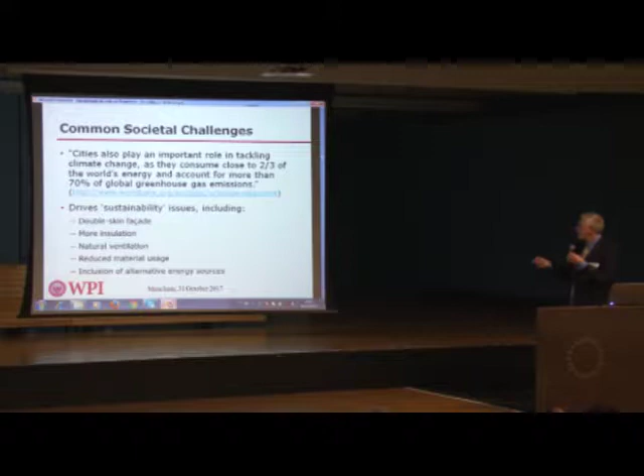Another challenge, as I had mentioned, is that as we look at sustainability issues and trying to reduce energy, we look very much at buildings. And it's been discussed that cities and very much buildings consume close to 2/3 of the world's energy and account for more than 70% of the global emission of greenhouse gases. So that really drives this issue for reducing the power load in buildings. So reducing the heating, ventilation, and air conditioning, reducing the lighting, being more efficient, adding more thermal insulation and other measures. And that gives us different opportunities.

For example, a double skin facade on the building, where now instead of just having the glass on the exterior, you have maybe a meter of space and another glass exterior, and the area in between is open, used for heating and cooling the air naturally in the tall building. And in concept, it works well, and for energy efficiency, it works well. But now we've just created an unmitigated path for fire and smoke. We spend a lot of time trying to make sure that we encase stairwells, elevators, mechanical shafts inside of the building. Now we're adding them to the exterior, which could create new problems.

We're adding more insulation. This is an issue of the Grenfell Tower, and I'll talk a little bit about that. But as Professor Sekizawa said, as we're becoming more energy efficient, people are looking for ways to better insulate buildings. And because a large number of our building stock is existing buildings, the most efficient way to energy retrofit is to put insulation on the facade. So if you're using combustible facade material and combustible insulation, now you're creating a new type of fire threat that in tall buildings is quite significant.

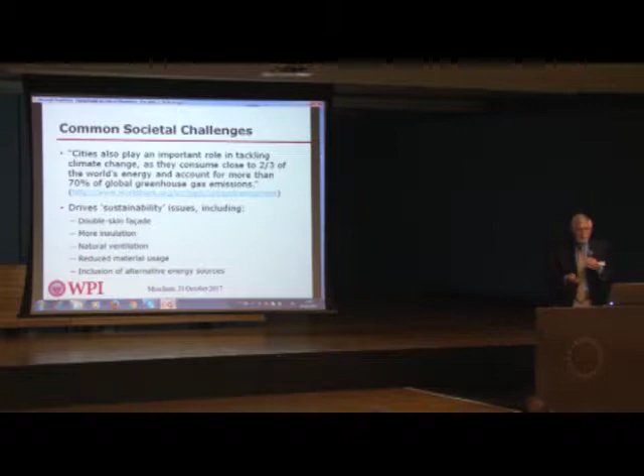And if people aren't really talking to each other, we set up this challenge of having competing objectives, and sometimes you're going to lose a particular feature or function of a building, and it could be a safety issue. But that's a whole other discussion for another day.

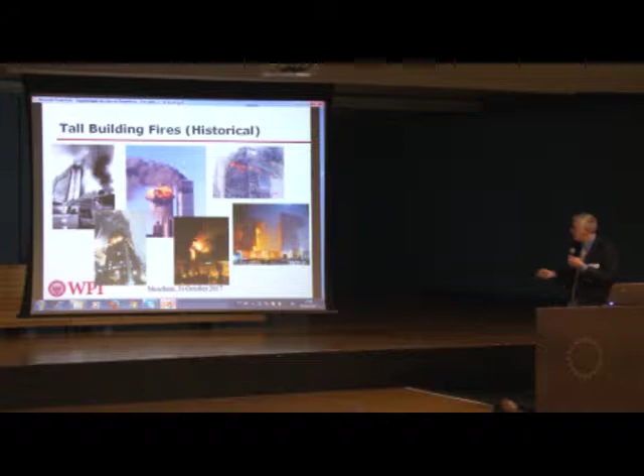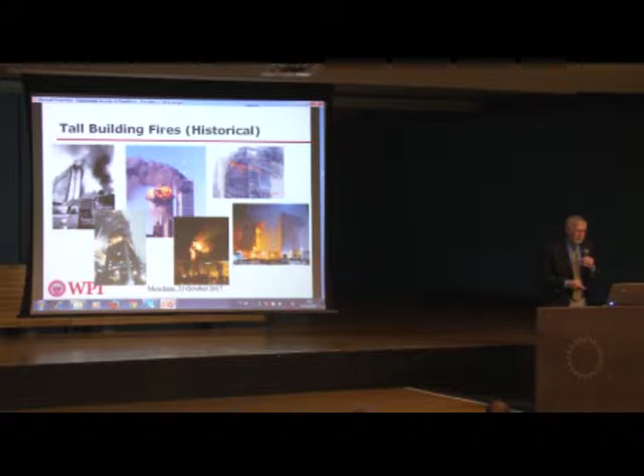So I won't talk about the historical fires. Professor Sekizawa did a very good job of that. But we unfortunately have very good examples of what not to do in buildings. The problem is we seem to keep repeating some of those problems. So even though we understand them, we seem to have a problem in repeating.

One of the challenges that we have today that we didn't have as much a few years ago is this issue of exterior facade fires. So we started to see quite a bit of them in the Middle East region maybe about 5 years ago, and we saw quite a few in China as well.

We've had some in the US, we had some in Australia, as I pointed out also this morning, but it wasn't until the Grenfell fire that people in countries that thought they knew what they were doing really realized that there was a major problem with putting combustible exterior facades onto buildings. So I'll talk more about that in a few minutes.

But other issues, the elevator operation, and Sekizawa talked about that. We know we need to use elevators to move people in and out of buildings, but when you're 800 meters or 1,000 meters and you need to move people, how does that system have to work? How do you have to protect the shaft? How do you deal structurally with not having too much movement in the building so that you don't get the elevator off of its pathway?

Structural fire resistance becomes a big issue because you're not going to be able to effectively fight a fire 50 stories, 80 stories above ground. You need that structure to be able to withstand the expected fire.

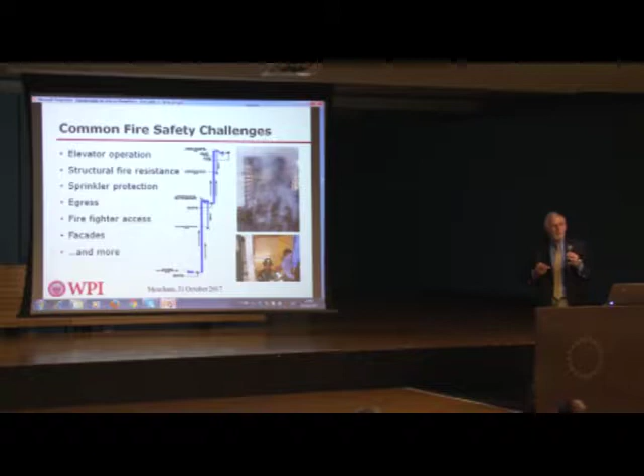And we'll talk about some of the facade issues and more as we go along. So these were all seen as issues that we wanted to somehow address in the guidelines. In addition, there's also the challenge of local availability of materials and components. And I was talking with some people about this earlier.

There's often the idea that you can look at what another country is doing, look at what their standards are, look at what the equipment is, but are you going to get that same equipment into your country? Do you have the same level of installation and maintenance standards? Do you expect things to work in the same way? It can be very difficult to adopt a standard from another country that assumes a certain level of technology, maintenance, knowledge, performance, but if you don't have that where you're implementing it, it can be a problem.

The local infrastructure is similar. That's your electrical grid, that's your water supply system, all of these other factors. In some of the Chinese cities, and particularly in some of the Middle East cities where they're building cities in the desert, you really have to think ahead about putting all that infrastructure in and then having a reliable power system. If you don't have a reliable electrical system and you build a super tall building and you're relying on elevators for evacuation and you don't have power, what are you going to do to get people out of 100, 150 stories? They will walk down the stairs. But that doesn't make it very easy for anyone going up in terms of dealing with an event.

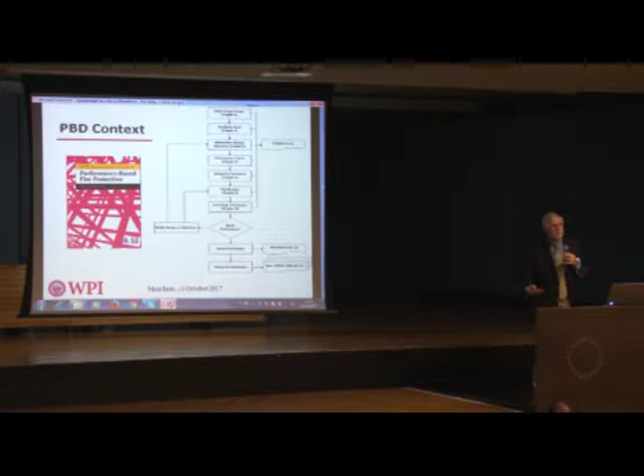So we start the process with a hazard and risk assessment. And when you're dealing with very tall buildings, it's not just fire. Unfortunately, we may have to think of terrorism, but also infrastructure, as I said before, the power grid going out or water issues, weather conditions in terms of very high wind, drought conditions, and others. So a tall building with a power outage is a big problem for all the people that live there.

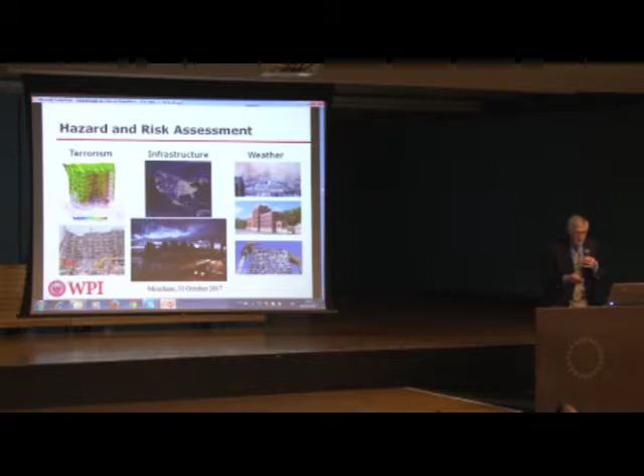So cities have to think about that, not just in terms of the fire safety, but in the ability of the people. And you have to think about what additional measures you might need to put in that building for life safety systems to effectively get people out in the event of a fire.

We recommend that a risk and reliability analysis be undertaken on the different systems within the building. So that's, for example, doing a fault tree analysis of what the different failure modes might be in your water supply system, your power system, your sprinkler system, your smoke control system, all of these areas to understand, is there any opportunity for what we call a single point of failure, where if you lose a critical system or component, you lose the capacity of that protection measure.

An example of that would be a water supply system for a sprinkler in a tall building. If you have a single riser, single hydrant system going up the building, and you have an event that causes you to lose that riser, now you have no sprinkler protection in the building. And there was a very good example of that, perhaps a bad example, the World Trade Center bombing from 1993.

So in 1993, the terrorists put a truck bomb in the parking area below the World Trade Center, which happened to be near the shaft which carried the communications and the power up the entire tower complex. So when they set off that bomb, you lost the fire alarm system, you lost emergency power, you lost communication. And at the end of the day, it took about 4 hours to completely evacuate both towers, in part because nobody had information.

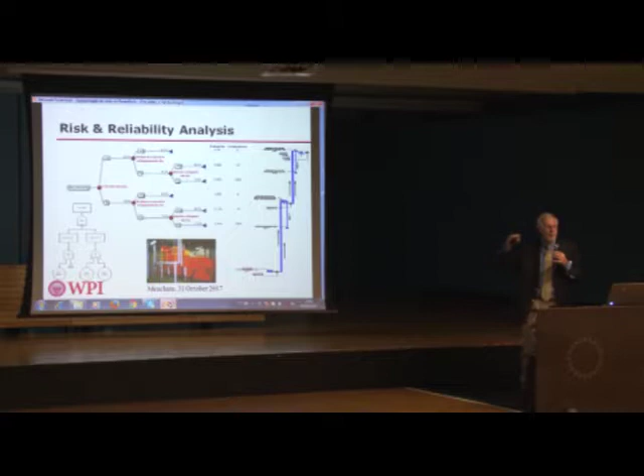So we always have to go through this learning process, but we have to really think about, what could fail and cause a problem. Then we look at what that problem is in terms of the fire, and we develop event trees that look at scenarios for both how the fire could spread and how big it could be if you have these failure points, but also what the impact might be in terms of getting people out of the building.

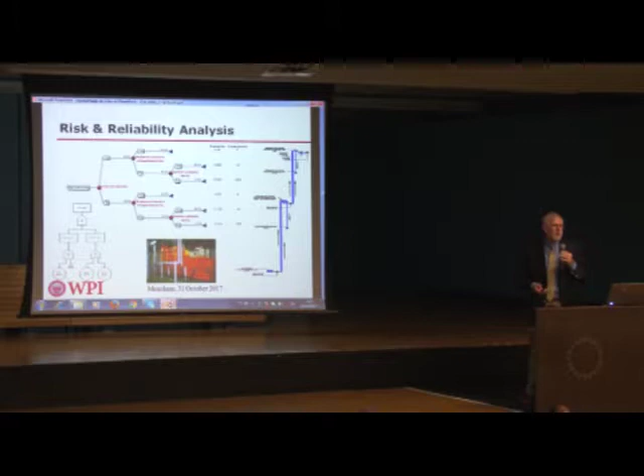So we tell people that this is required. We don't give a lot of detail, but we also point to, for example, the SFPE Handbook of Fire Protection Engineering, which has several chapters on risk and reliability analysis.

As Professor Sekizawa already discussed, egress is a big challenge in tall buildings. One of the first things you have to do is identify your egress goals. And by that, a simple question of, do you expect to simultaneously evacuate everyone from the building? Do you expect only to evacuate certain people and keep other people remaining in place? Or do you keep everyone in place except for the floor of the fire?

So Grenfell, for example, in the UK, they have a stay in place philosophy. So everyone basically was expected to stay in their homes because the compartmentation of the building was expected to keep the fire to one compartment while the fire brigade came in and did their job. But you have to decide which strategy you're going to use, because that's going to help make the determination.

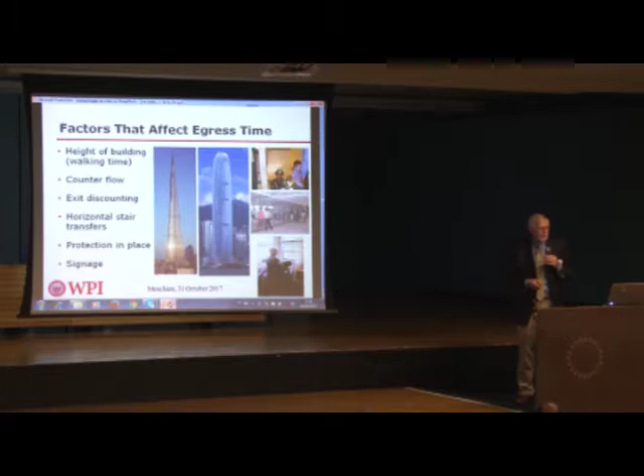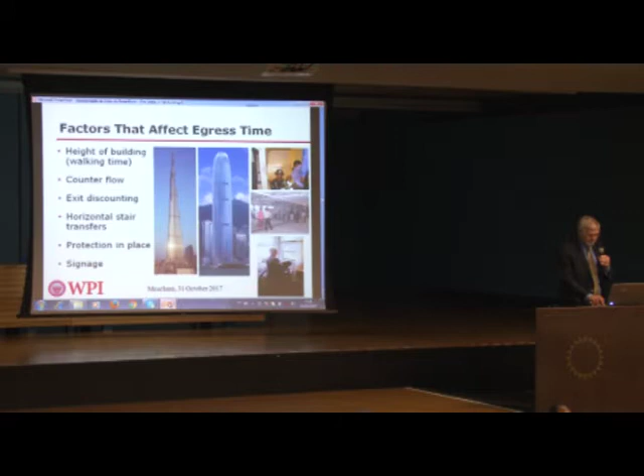Also, I showed earlier in one of the photos the Petronas Towers in Kuala Lumpur. And that's a building with 2 towers with a sky bridge connecting them. And maybe I'll try to go back to that quickly, if I can find it. So the idea initially when the building was constructed was you're only going to have an event in one building. So if the fire's in here, building occupants from this tower can go across the bridge and evacuate. And it makes perfect sense.

However, after 9/11, when there was an impact on the Twin Towers, there was an analysis done of the building, and they ran an evacuation drill. And so people came down here and crossed, but people came down here and crossed, and you had a problem in that sky bridge. And so you have to think, if you're assuming a scenario of one event in one tower, and you have many sky bridges here, what if you had simultaneous events? Are people going to be trying to exit from opposite directions into that sky bridge? So that's a scenario you might need to think about.

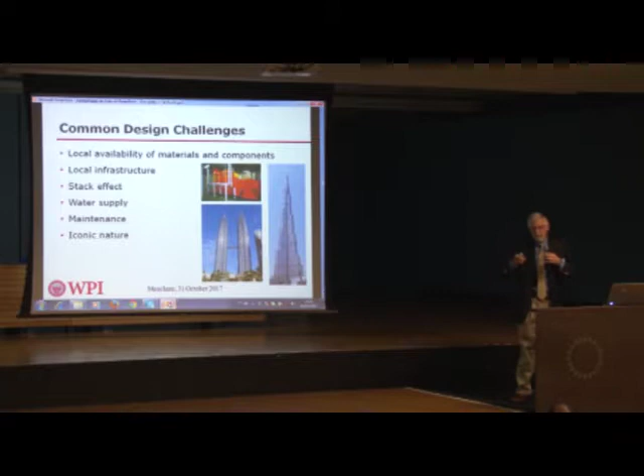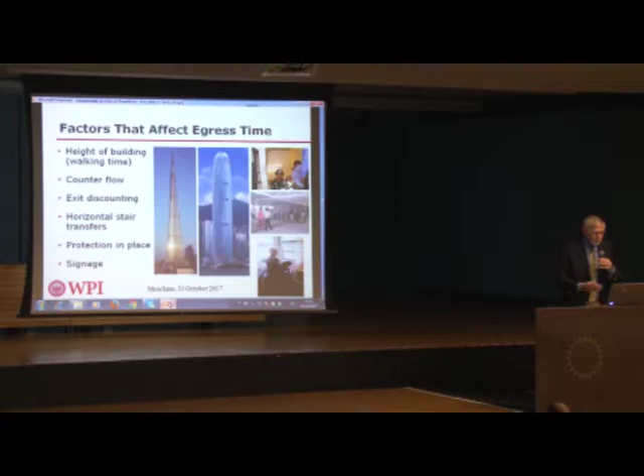And as buildings get taller, that becomes a bigger issue because you have much more limited space in the building to move people. So you have to think about all these different options, and when you get to protection in place, that becomes a big issue as well.

Professor Sekizawa talked about the use of elevators, both occupant use and fire service use. And I think, in my opinion, it's very difficult to design a super tall building without considering the use of elevators for occupant evacuation. One of the strategies that can be used, though, is to have people come down to a certain floor by stairs and then have elevators that can shuttle people to a lower level.

So instead of thinking about evacuating everyone using the elevators, you can think about only moving a certain segment of the building to a safe floor and then be able to shuttle people from there. And then you can maybe get a more effective use and optimization of the elevators and the stair use. But there is a big concern for protecting the elevators and developing appropriate control mechanisms so that people can feel safe.

In terms of the elevators, they have to be operational in an event if you expect people to use them. So they have to be protected against smoke ingress, they have to be protected against water coming in, perhaps from firefighting or sprinklers on an upper floor. You have to have very reliable controls. You need to have good communication.

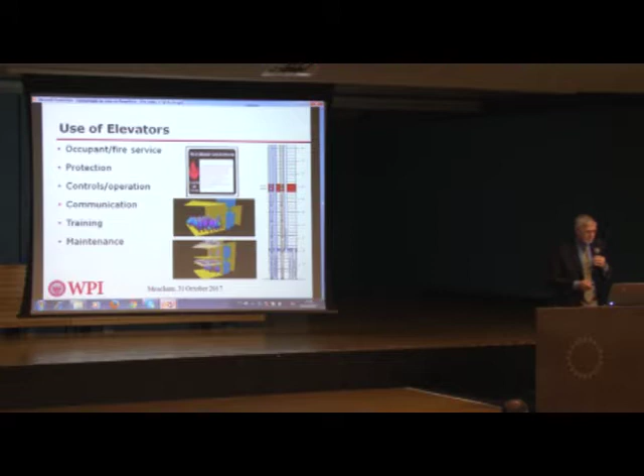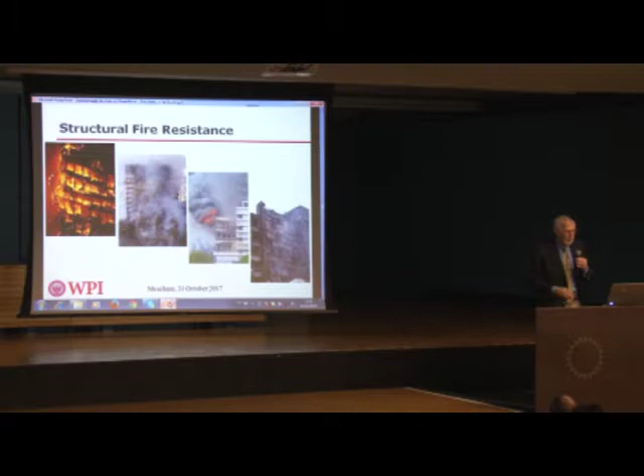So when you're doing design, you have to think about what is that movement of the fire? And it's not just the compartment of initial fire you're worrying about, it's what's the potential horizontal and vertical spread, and will you have heating and cooling effects that you have to deal with, and what kind of stress will that put on the building as well. So again, in the design, you really need to think about what your structural resistance goals are and what type of structural system you're going to have.

So how will the load shift as you have a fire? Will you get appropriate load redistribution? What's going to happen to the primary structure relative to the fire? Will you have spalling? Will you have loss of fire protection over time? And so you need to think about the different scenarios that you are going to assess the building under and pick strategies that are appropriate for the resilience.

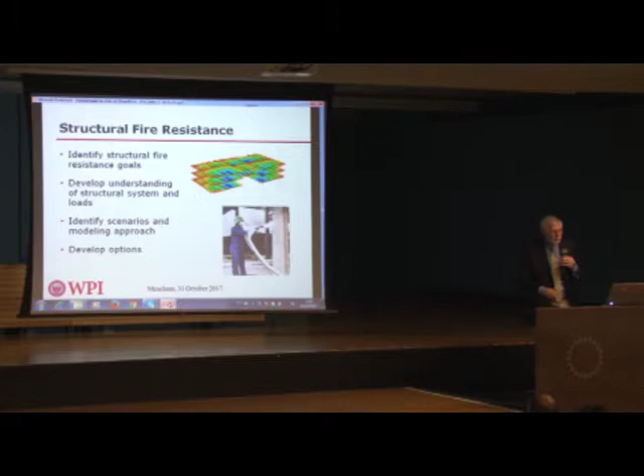One of the big challenges that I think we have with structural fire protection is that we have a significant reliance on the standard fire test. So we have in ISO and ASTM and other standards a standard design fire curve which talks about how much temperature you have increased over a particular period of time, in minutes or hours. But fire in a building doesn't know anything about the standard fire curve. It may be great for comparing products, but in reality, we have fires that may burn much hotter more quickly. We have fires that might be longer duration.

We have different effects. For example, I've done some work recently on post-earthquake fire performance. And one of the issues that you have in an earthquake is you get some damage, for example, to your fire protection system, for example, gypsum wallboard. And when you have a fire after you have damage to that gypsum wallboard, you can get failure of a 1-hour system within 10 minutes, because that fire rating in a furnace is based on perfect conditions.

But you rarely have perfect conditions in a building, just normally over a long time, but certainly after an event like an earthquake. So if you're assuming that you have a 1-hour fire resistance and you breach that protection in 10 minutes, you're going to have a much different challenge on your hands within that building. So you need to think about what your real fire scenarios are, what type of analysis you want to do, and what your criteria are.

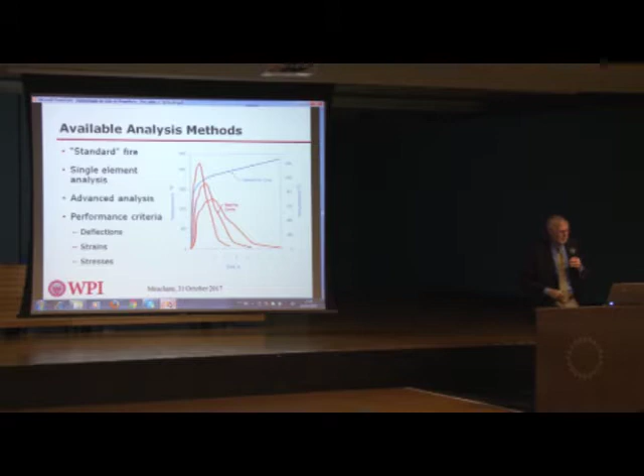It might be deflections in the members. It doesn't have to be full failure, but if you have a little bit of deflection and that opens a gap in the facade between the floor plate and the curtain wall to allow fire to spread, now you've created a fire spread mechanism. So the deflection of the structural system could have a significant impact on vertical fire spread. So all of these types of issues really need to be considered.

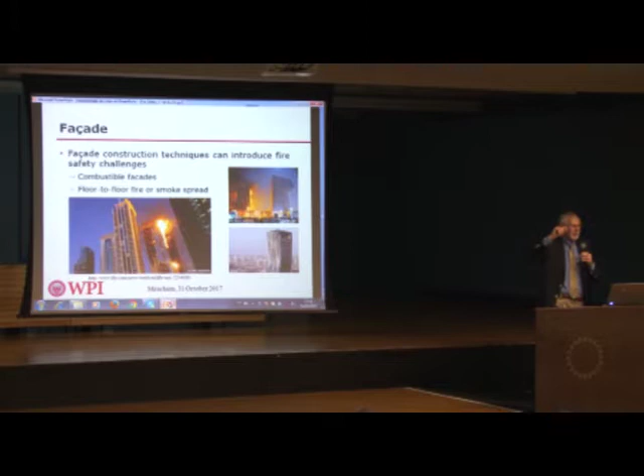Here, of course, we now have the issue with combustible exterior facades. Many buildings have things such as aluminum composite material panels, which are aluminum, zinc, magnesium, or other metals on the outside, but with a polyurethane or polyethylene core, which is combustible. And part of that is there to provide thermal insulation. And that is a result of some of the sustainability issues that we're pushing in terms of kind of a global society.

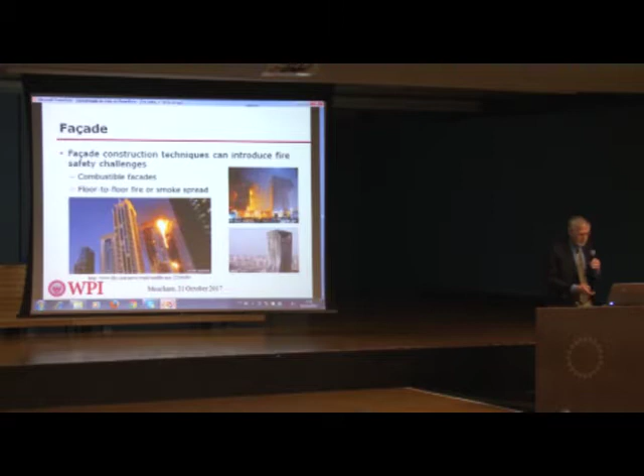And we saw the fire at the Mandarin Oriental Hotel at the CCTV building and some in the Middle East. But we really have to think about what could happen in a building to ignite those fires. Professor Sekizawa talked about spandrels and different challenges, but you also have to look at the height of the floor, the size of that ventilation opening, because you're really looking at the length of flame and the extension of the flame. And the problem is you're looking at a radiant exposure to the glass.

So if you don't deflect that flame far enough away and the flame goes up the side of the building, then you can still get breakage of the glass, which could propagate the fire. So there's a lot that can be done with fire stop materials that can bridge the gap between the floor deck and the curtain wall, thinking of the size of the spandrels, but we also need to think about wind direction. When you're thinking about your spandrel height and other design features, where is the prevailing wind from? What are the wind effects on the building going to do to your flame? Those types of issues have to be dealt with.

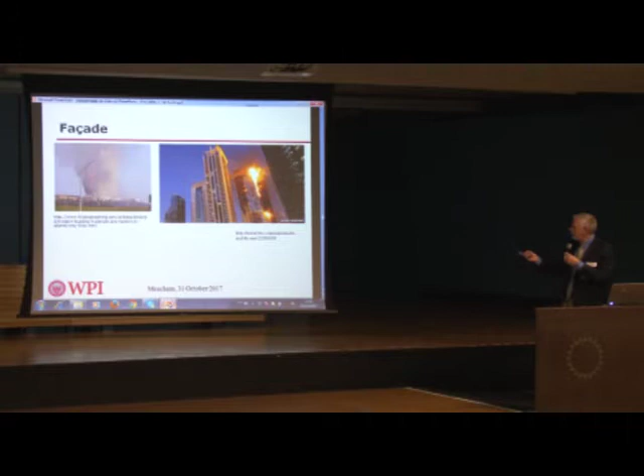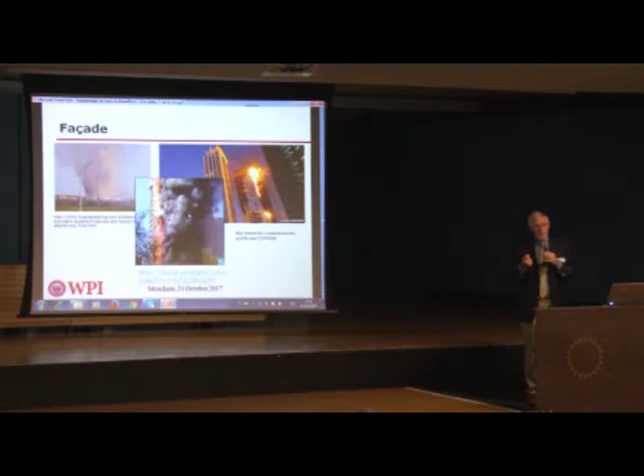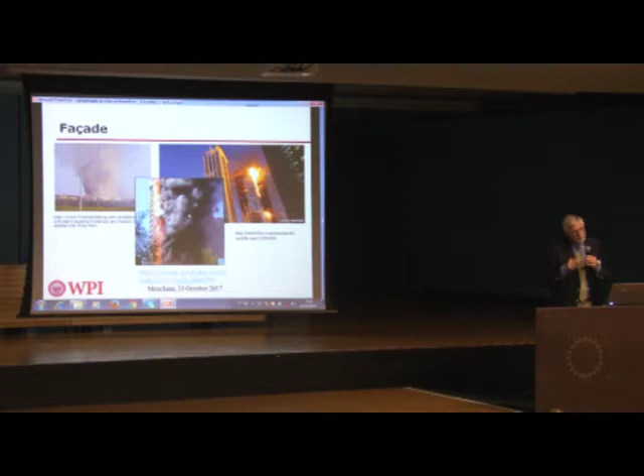I don't think I have internet access, but if you haven't seen this fire in France, you should go onto YouTube and search Tall Building Fire France, because somebody with a cell phone happened to catch the building fire when it was just in one compartment and watch it go to the top of the building in less than a minute. It's a very powerful video because unlike Grenfell or the CCTV building where you see the fire once it's fully engulfed, if you see the actual rate at which the fire can spread, you get a very interesting understanding of what the challenge really is. So do that search on YouTube. It's also a very good teaching tool.

Grenfell was mentioned a few times, and the building was renovated for energy and aesthetics. This is one of those situations of competing objectives, but if there were no need to upgrade the building for energy performance, you might not have had this issue, or if they had picked a non-combustible insulation, there might not have been an issue. But once the fire started, because there was so much combustible facade material, as well as thermal insulation under the facade material, you completely engulfed the building.

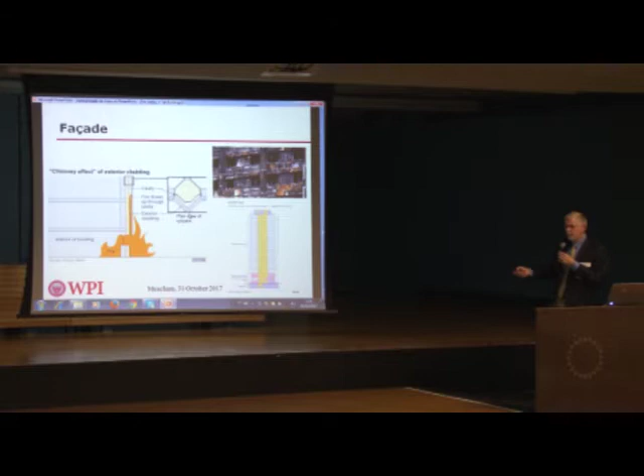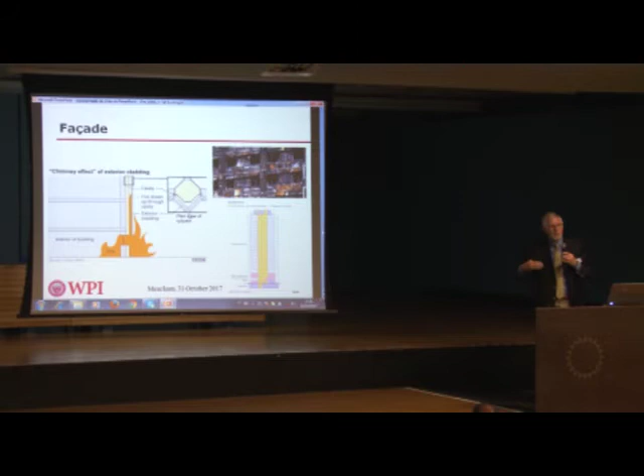On the exterior was this ACM, aluminum composite material, then an airspace, and then against the wall a combustible insulation layer. So you actually had parallel plates of combustible material, a ventilation shaft, and fire spread in between. That's another reason the fire was more severe than if you had just the fire on the exterior, because you had much more material involved. And when you have a lot of material burning, you start to break windows, you get radiant ignition inside the apartments, and pretty soon all of the building is on fire. So you have to think about not only the structural performance, but where the window openings are and how the fire might get into the building.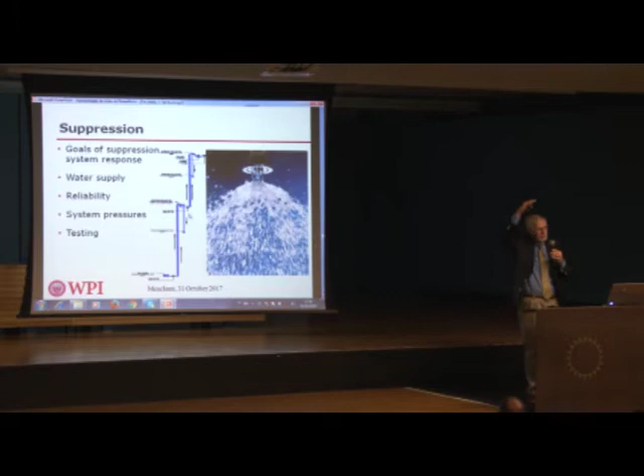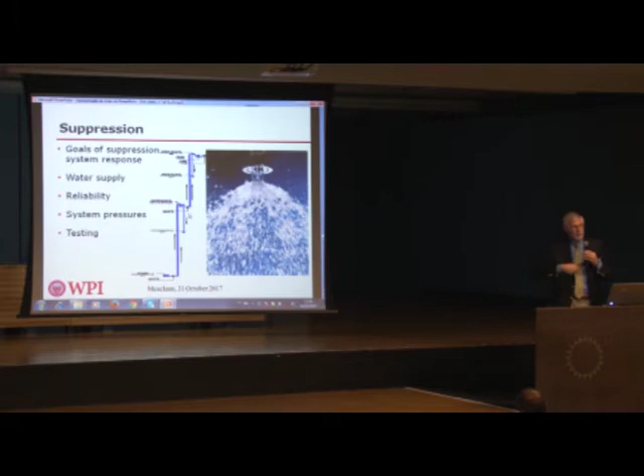Suppression systems I talked about before: do you have to put intermediate water supplies, how reliable does the piping network need to be, what system pressures and flows are needed when you're at 800 or 1,000 meters. You need some pretty strong pumps to move water up there, and that has to be planned in advance. You want to have the water there and not rely on the systems during the emergency. Those are all design phase issues. We need to think about that with detection and alarm systems as well, about redundancy and survivability, especially if you have voice communication.

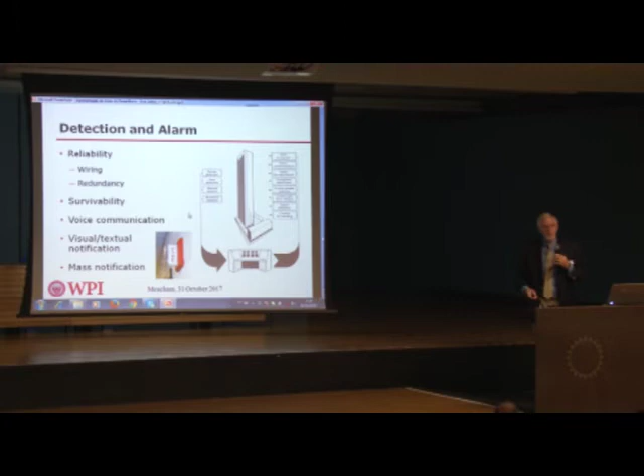So you're not running all of your cabling in one conduit. You have multiple communication paths. So if you lose one channel or one line, you have other options for continuing that network.

Smoke control is a major issue as well, and we learned our lesson in the US in the 1980 MGM Grand Fire, where a fire in the casino level ultimately killed more than 80 people, mostly in the upper levels of the hotel because of smoke migration up the elevator shafts, stairwells, and so forth.

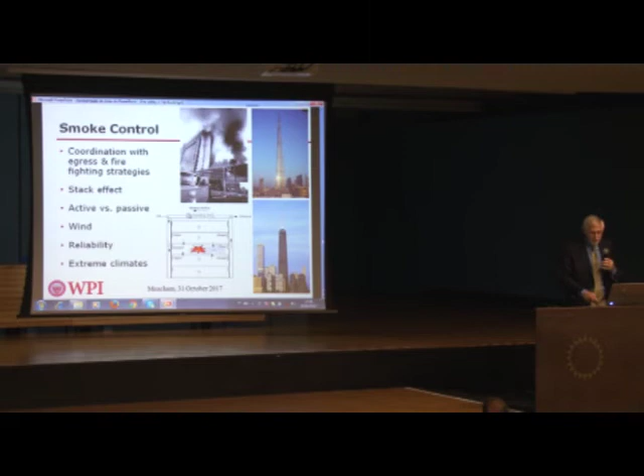And we've done pretty well about providing good smoke protection and compartmentation, but as you get into very tall buildings, you're getting issues of stack effect and wind effect that make it very difficult to control for pressurization and other types of systems, especially if you're looking at pressurizing shafts for evacuation.

And you have different effects if you're in a cold environment where it's cold on the outside and warm on the inside, as compared to what we call reverse stack effect, where it's typically warm on the outside and cold on the inside. And that'll have a difference in terms of where you're likely to see the smoke pushed and how that's going to impact different levels of the building.

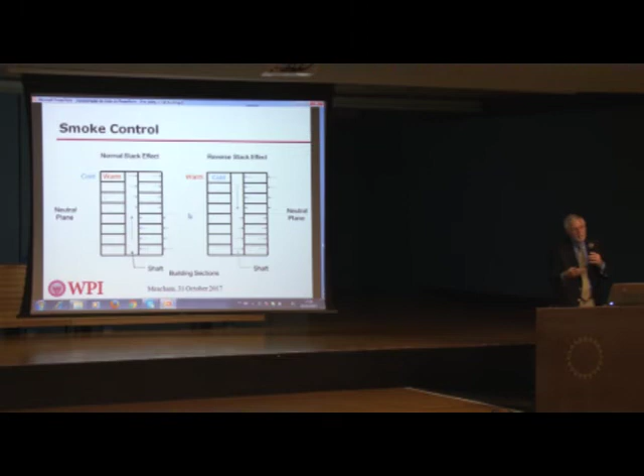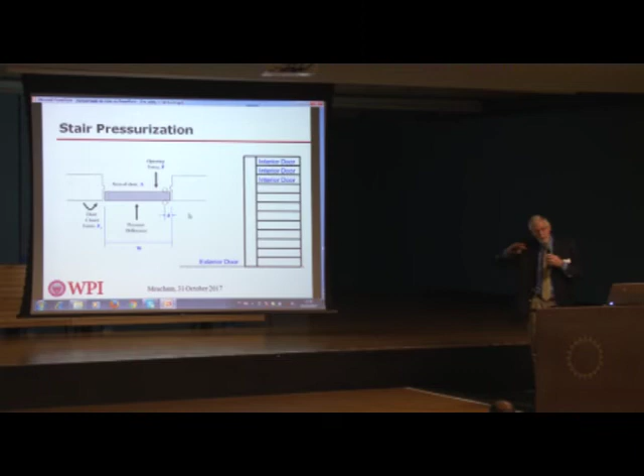I had mentioned earlier, if we're thinking about continuous shaft for evacuation and you're looking at pressurization systems to keep smoke on the fire floor and not go into the stair, that's fine, but you need to be able to open the door. Occupants have to get out. So if you have a very tall building, you might have to split that shaft. One continuous shaft will not be able to be pressurized and still be able to open the doors. So you have to think about those types of issues as well.

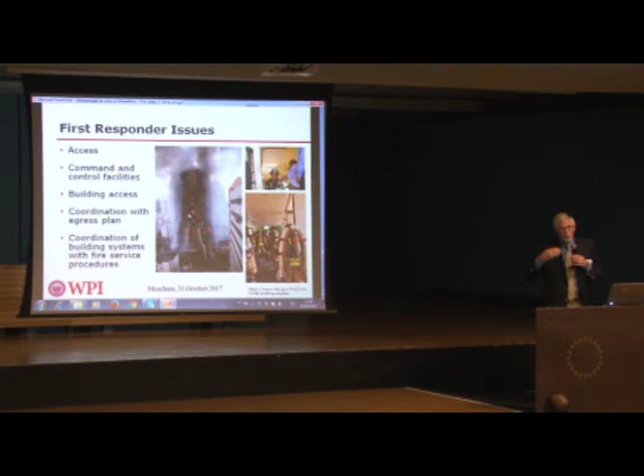Fire service, first responders have a number of issues. As buildings get more dense in terms of the city and get taller, it gets really hard to get access to the building with apparatus. It's also very difficult to get very high in the building with all the gear that needs to be brought in. So a lot of planning needs to be done in the building design phase to accommodate fire service needs in terms of communication centers, air filling, access for equipment, coordination with other building services, and so forth.

I've already mentioned electrical reliability and standby power may be necessary. We have to deal with that, which is important. And we also have to think about buildings under construction. We can have significant fires when buildings are under construction, and when the fire protection is not in place, then your failure potential is much higher.

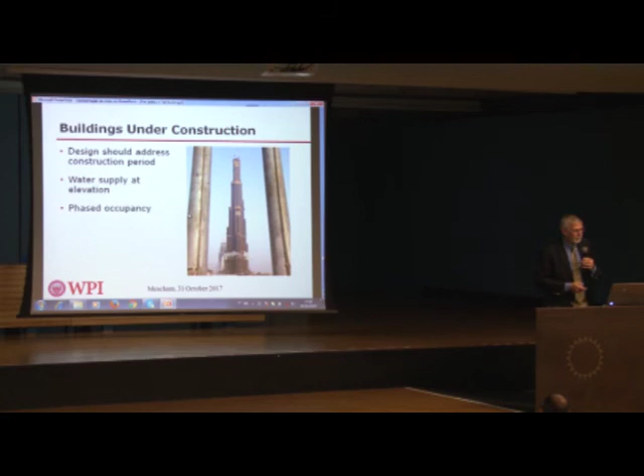So what is the plan for protection during construction? Is there water supply on site? Is there a hydrant system or a riser system for the fire department? Is there a partial sprinkler system? You can't think about waiting till the building is completed. You have to stage that fire protection. Otherwise, you could have a very serious problem in a fire that you're not going to be able to fight.

One of the last things that we really need to think about is test, inspection, and maintenance, fire safety management of the building. We need much more reliable systems when you have these cities in a building, and so you have to have very good operations and maintenance manual, inspection, test, and maintenance cycles, reporting like I talked this morning about the warrant of fitness to make sure that everybody understands their responsibility with safety management in buildings.

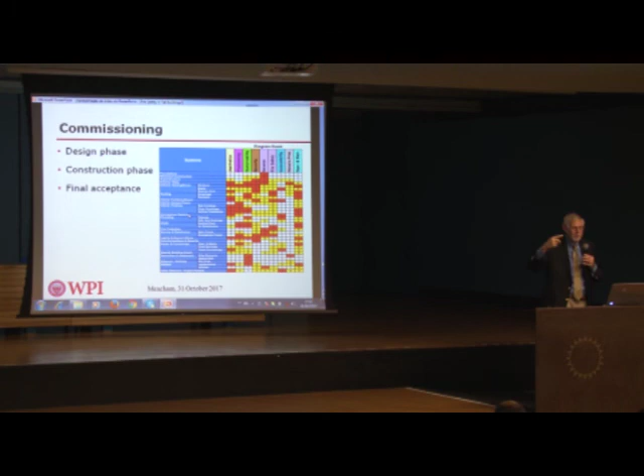And before the building is even occupied, you have to make sure that you test all the systems. So in the past, people only did a representative sample of smoke detectors and different systems to make sure they work. But if you have this complex network of smoke detectors, activating pressurization systems, recalling elevators, and doing all of these other functions, you need to test that every system is working appropriately so that a fire on the 47th floor doesn't send the elevator to the wrong location. So it becomes very important to really think about those issues.

So finally, the last point in the SFPE guide is we knew the guide couldn't cover everything, but there's a lot of resources that are identified to help address some of the issues of reliability, egress analysis, and other issues appropriate to tall buildings.